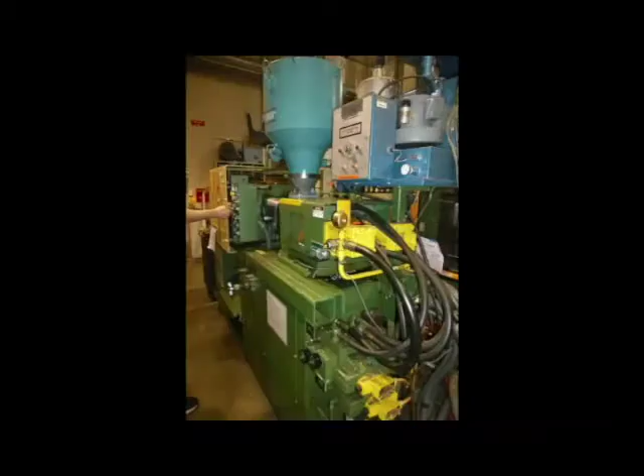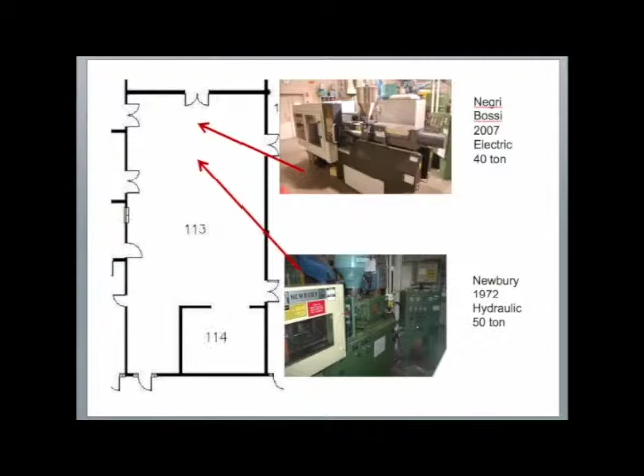In this instructional video, we'll go over how to operate the Newbury 1972 hydraulic 50-ton injection molding machine in the plastics lab, which is room 113 of the Ross Engineering Technology building at Western. This video is intended for students who have completed or are currently enrolled in ETech 333 and have gone through the injection molding demo but would like a review on how stuff works.

Remember that safety glasses must be worn at all times in the plastics lab. Be aware that the nozzle and mold can get very hot, so use hot gloves when removing a stuck sprue from the nozzle, or removing parts that get stuck in the mold. When removing a stuck sprue, be careful not to smack your hand on the ejector pins of the mold. The barrel has a heat shield, so as long as you don't reach around the heat shield, you don't have to worry too much about the heat from the barrel.

Also, be careful not to get pinched by the mold door when closing, and watch your step around the machine. Avoid tripping over the water lines and tubes behind the machine, and avoid slipping on any water and resin that is collected on the floor in front of the machine.

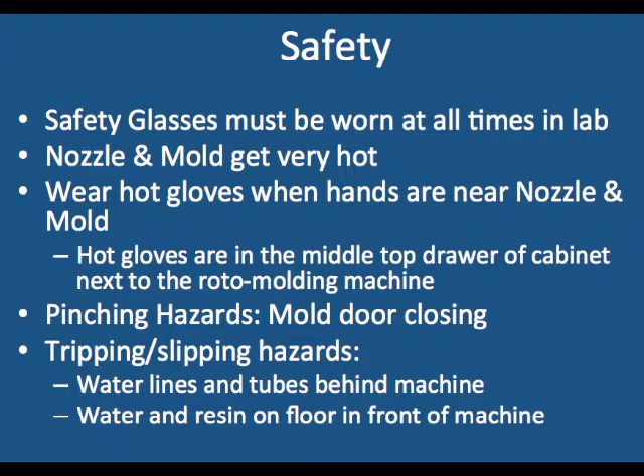Hot gloves can be found in the middle drawer of the cabinet next to the rotomolding machine. The brass screwdriver and hammer are located in these drawers.

Injection molding is a manufacturing process in which parts are produced by injecting a molten material into a mold cavity at high pressure, which then solidifies into the shape of the mold cavity.

First, ground chunks of plastic are fed into a hopper. The plastic enters a barrel where it is melted by heaters surrounding the barrel and mixed with a rotating screw. Then the molten plastic is injected into the mold at high pressure.

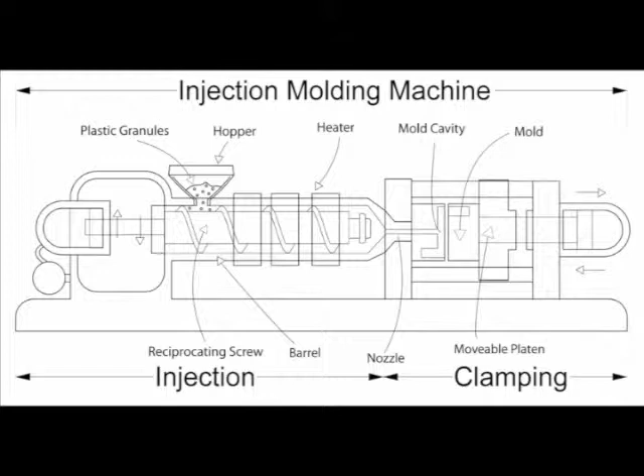As the plastic cools in the mold, it shrinks, so pressure is maintained to allow more molten plastic to flow into the mold, filling any additional space. The screw is retracted to refill the reservoir for extrusion, and then the mold is opened and the part is ejected.

Now we will go over the procedure for operating the Newbury injection molding machine, assuming that the resin currently being used does not need to be changed.

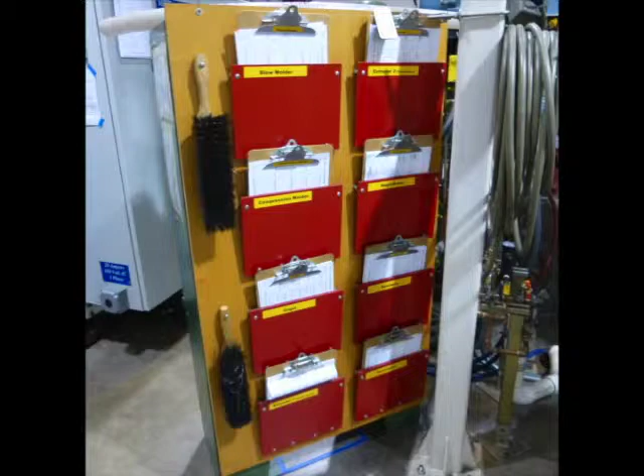Before using the machine, sign in and fill out the machine log on the Newbury clipboard, which can be found on the right side of the machine. Fill in all the information, including your names, class, time you used the machine, which mold you are using, and the last resin used.

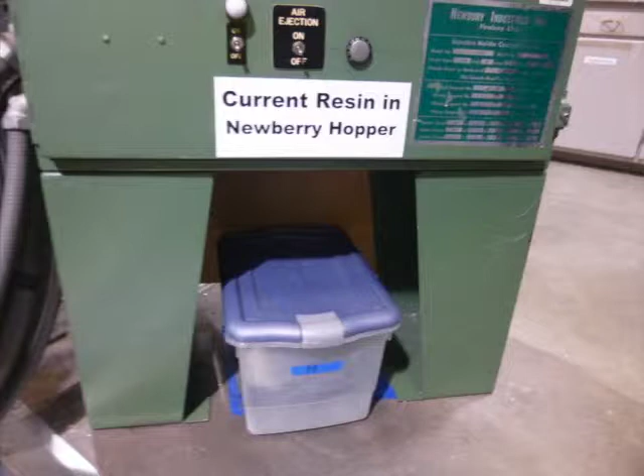Check what resin is currently in the hopper and determine the appropriate temperature for that material using the cheat sheet located next to the machine. If necessary, make adjustments to the temperature using the controls shown here.

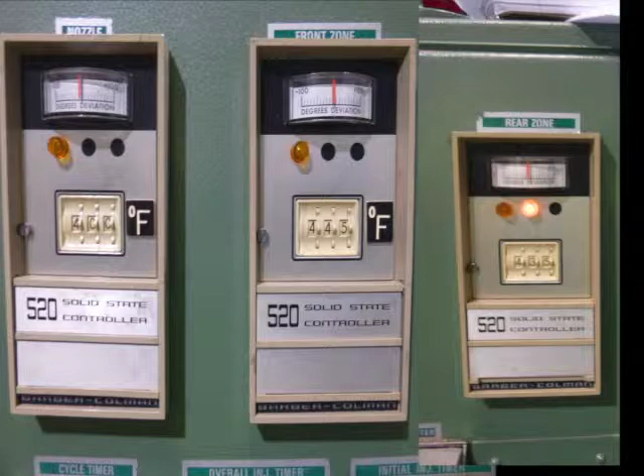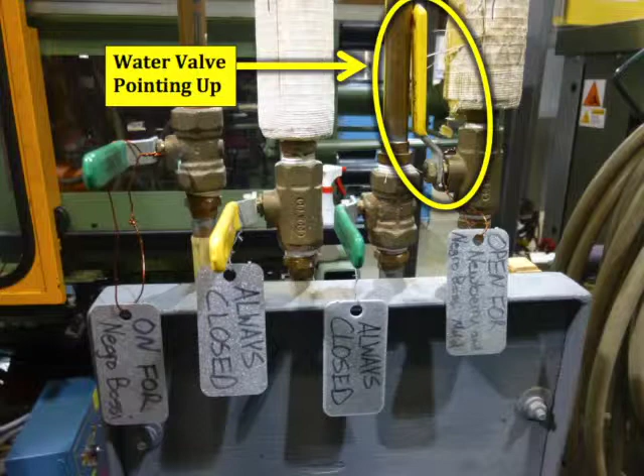Begin by turning on the hopper to dry the resin in the hopper. Turn the main power switch to power on the machine. Turn the water valve to the up position to help cool the motor. Turn on the motor using the yellow button. If the motor won't turn on, make sure that the nozzle guard is down, back gate closed, and main power is on.

After turning the motor on, turn on mold temp control. If already on, first turn it back off and back on. Allow about 15 minutes for the machine to heat up and melt the resin. Refer to the directions posted on the injection molder to start the machine properly.

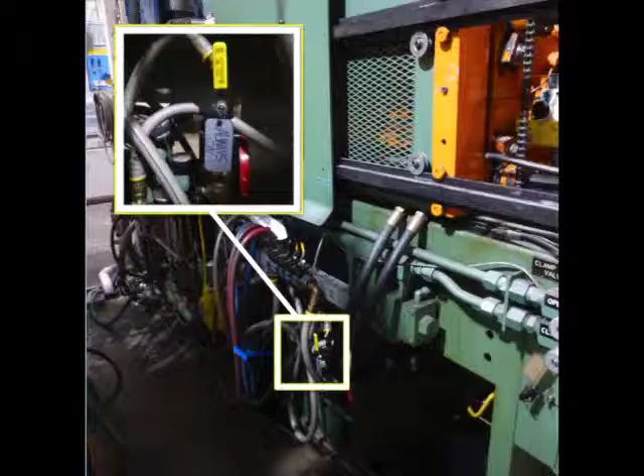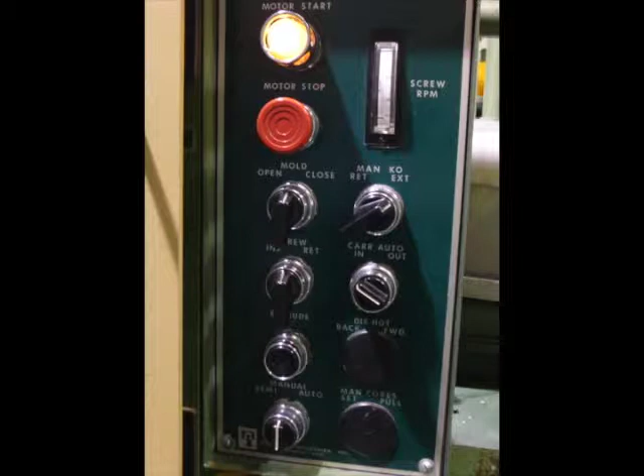You will also want to make sure that the ball valve located behind the machine is open in order for the mold to function. Once the machine is heated, locate the control panel to the right of the mold. Start the cycle with the mold open, ejector pins back, barrel full with screw back, and carriage forward against the screw bushing.

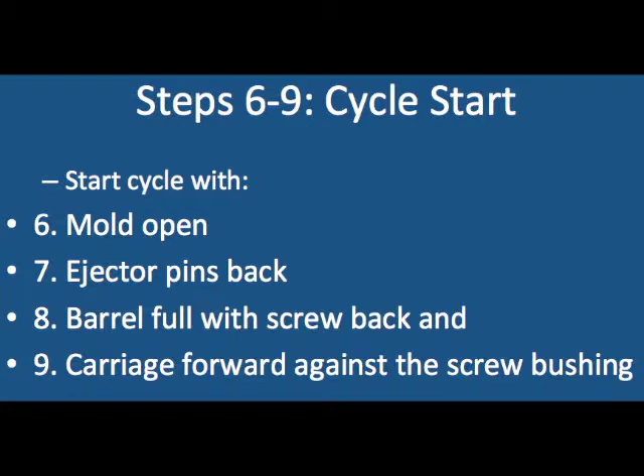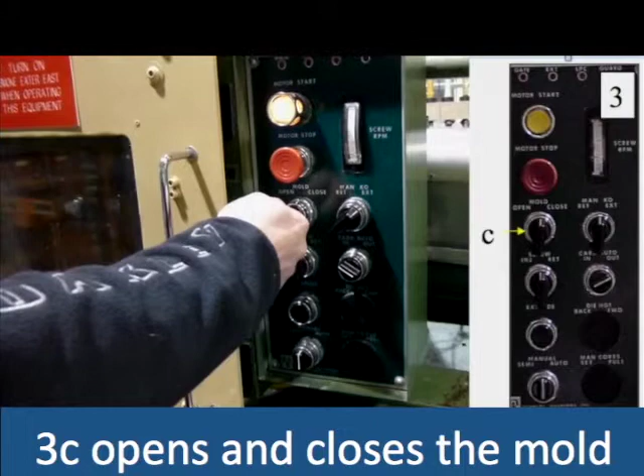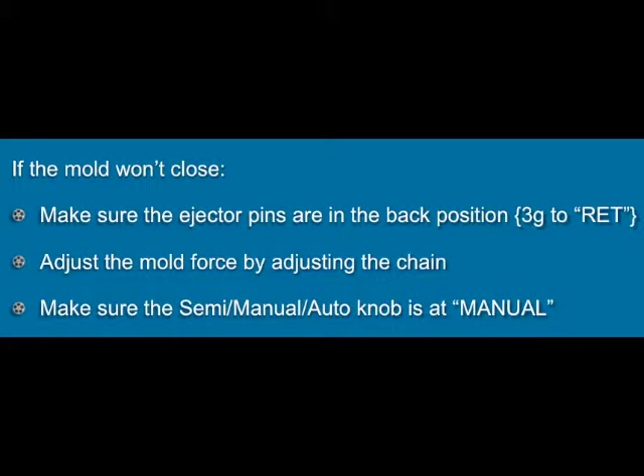Close the mold and watch for the clamp to lock. If the mold won't close, make sure the ejector pins are in the back position. Consider adjusting mold force by adjusting the chain, or make sure the semi-manual auto knob is at manual.

Inject resin into the mold by turning the screw switch to the inject position and hold for the set amount of injection time while watching the timer on the control panel. Once the timer times out and the light turns off, release the switch.

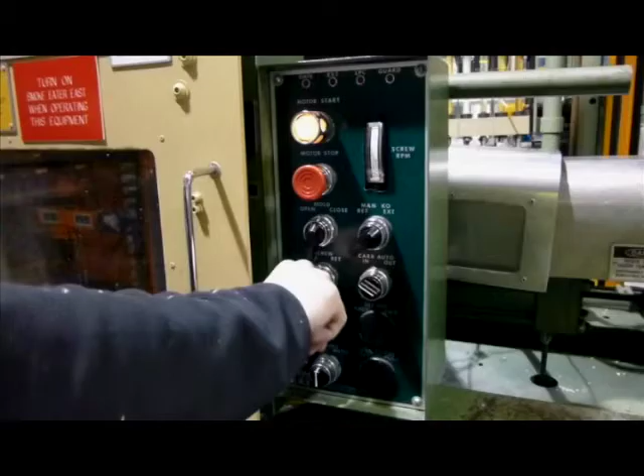Refill the barrel for extruding by turning and holding the extrude switch until the extruder is moved all the way to the right, which can be seen through the grating next to the barrel.

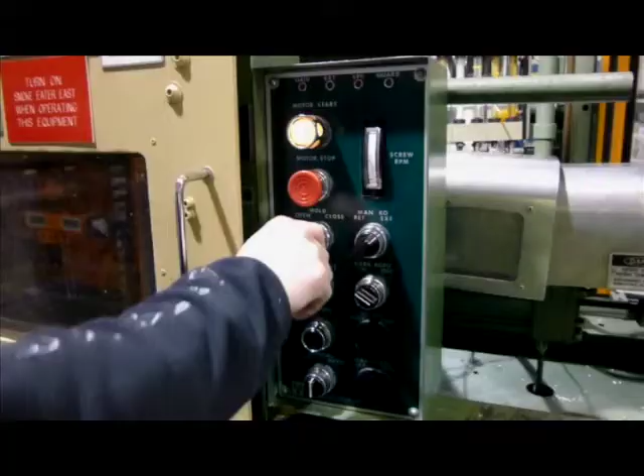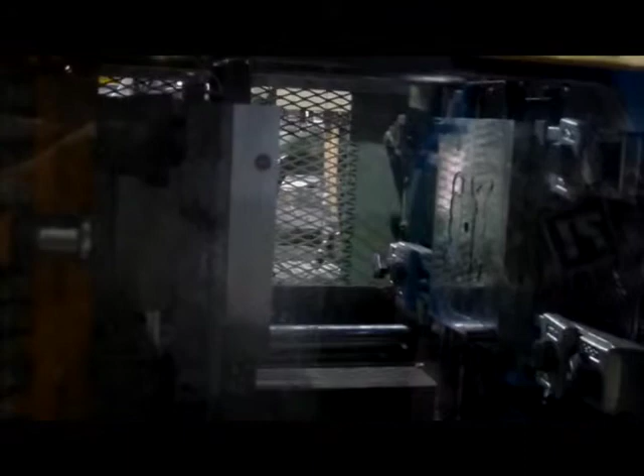Wait for the part to cool and open the mold. Then eject the part using the switch to the right of the mold switch. Retract the ejector pins and repeat the previous steps listed here to create a new part.

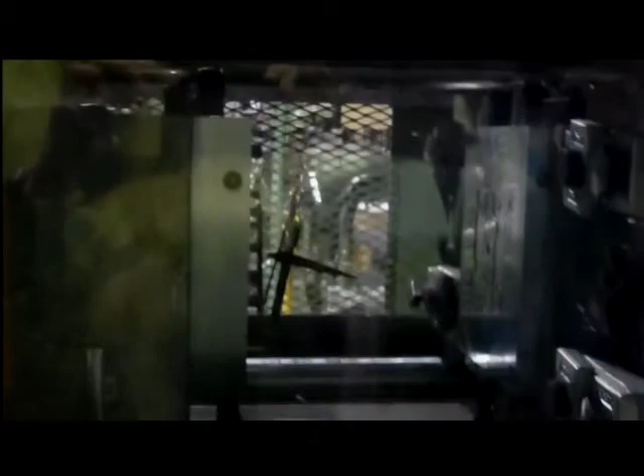If the part gets stuck and doesn't eject from the mold, open the mold cage door and carefully reach in and remove the part. The plastic may still be hot, so consider using hot gloves. There are hot gloves in the middle drawer of the cabinet next to the rotomolding machine.

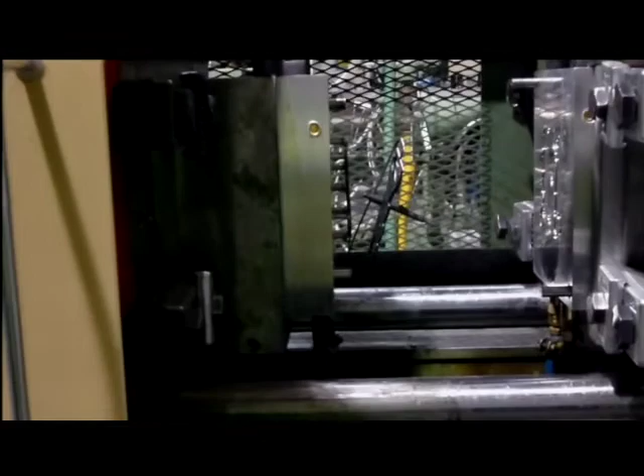If you get an incomplete part, or if you're experiencing flash with your part, adjustments can be made to injection size using the knob on the right side of the extruder.

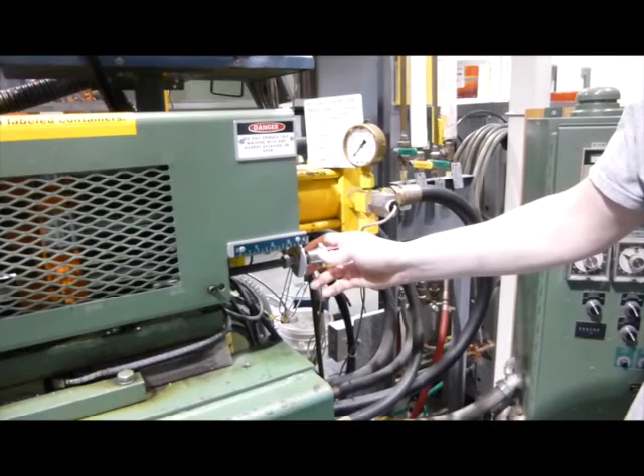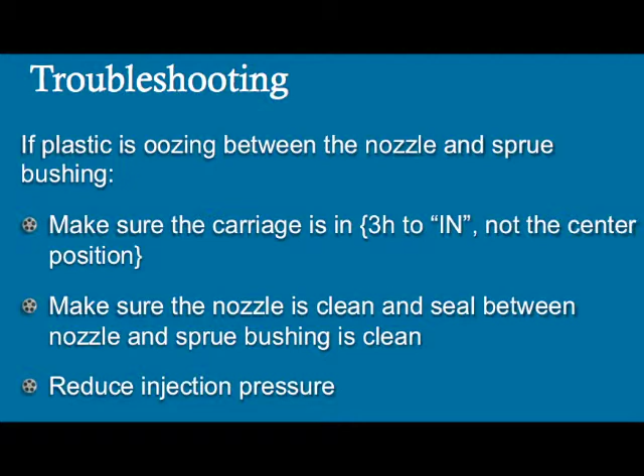If plastic is oozing between the nozzle and sprue bushing, make sure the carriage is in. Make sure the nozzle is clean and seal between nozzle and sprue bushing is clean, or reduce injection pressure.

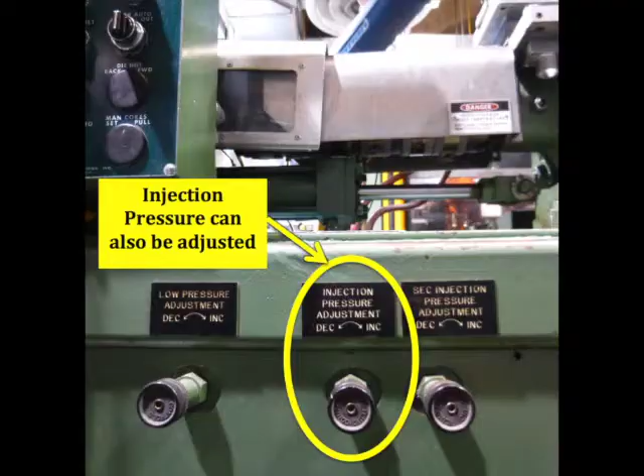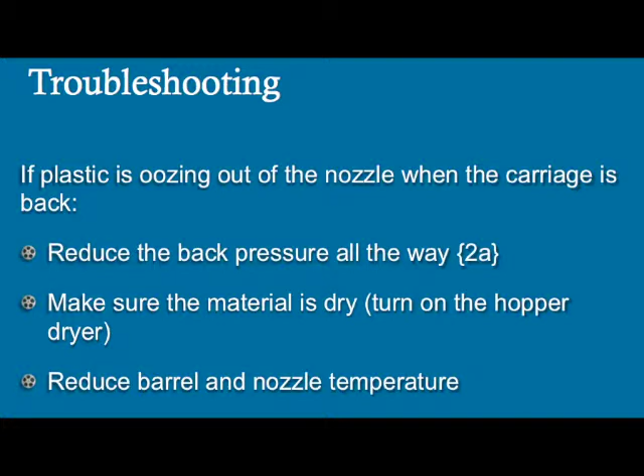If plastic is oozing out of the nozzle when the carriage is back, reduce the back pressure all the way. Make sure the material is dry by turning on the hopper dryer, or reduce barrel and nozzle temperature.

If plastic sticks in the A-side sprue bushing, pull on the sprue from inside the mold with your hand or a heated brass sprue puller. Tap on the sprue with a brass rod and dead blow hammer, or make adjustments to the machine to increase the shrinkage of the plastic in the mold.

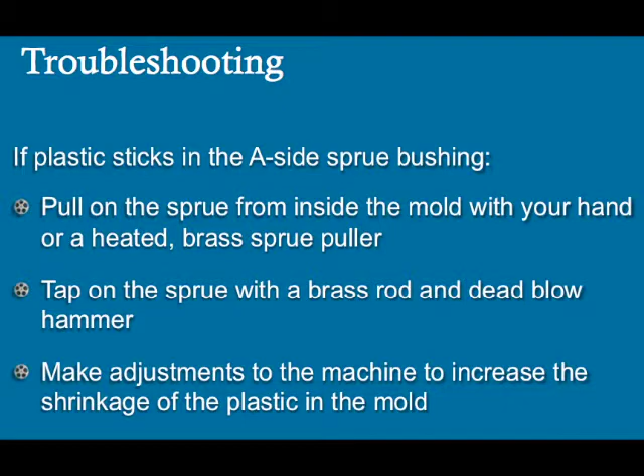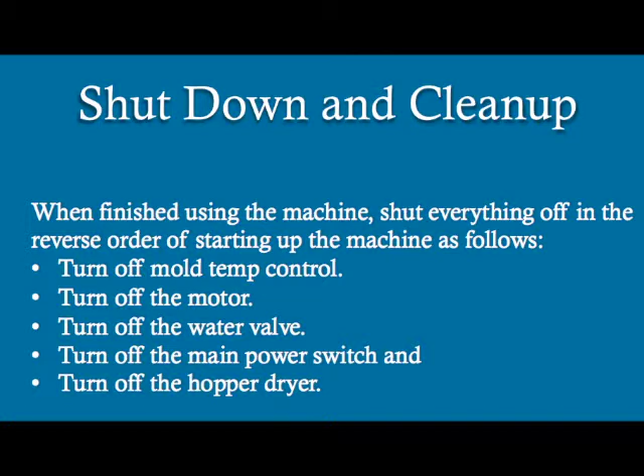When finished using the machine, shut everything off in reverse order of starting up the machine, as follows. Turn off mold temperature control, turn off the motor, turn off the water valve, turn off the main power switch, and finally turn off the hopper dryer.

Replace all tools to their proper locations and clean up the area using the brooms and dustpans available in the shop.